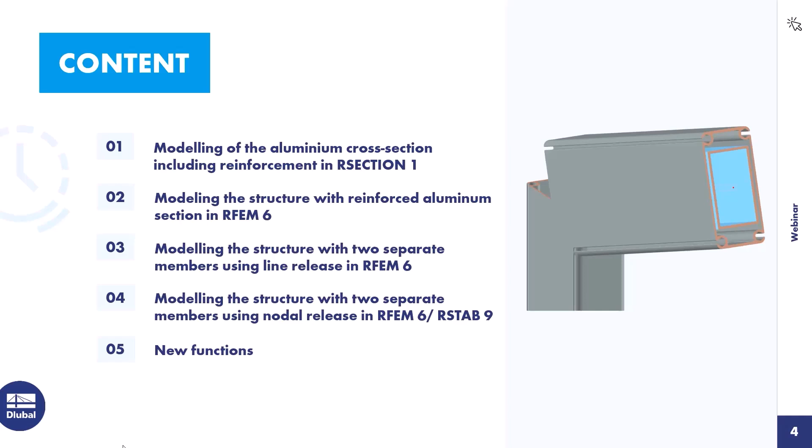This brings me to the first point, the modeling of the aluminum cross-section, including reinforcements in RSECTION. The cross-section geometry is available in DXF format so that I can use the import function. The creation of cross-sections based on DXF files was the subject of a previous RSECTION webinar. You can find this webinar on our website or on YouTube. There's also a knowledge base article on this topic on our website.

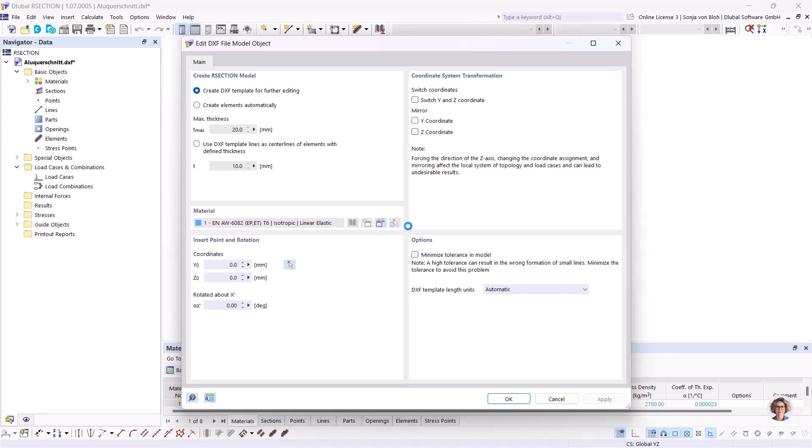I start the import process via File, Import, DXF. Then I choose the corresponding DXF file and click on Open. In the import dialog, I select the option Create DXF template for further editing. And then I click on OK. Now the lines of the DXF file will be created in RSECTION.

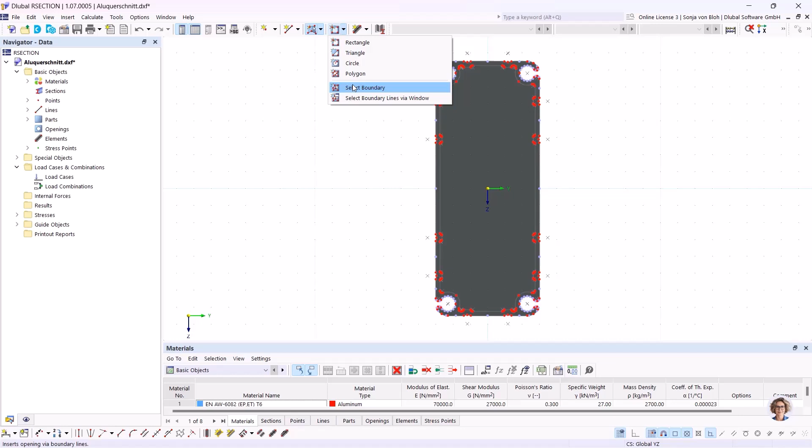I first create the part using the function select boundary. Here I have to define the material. I want to use this material that's already chosen here in this box. Then I click on OK and then I click on the corresponding line. The part is now created. Now I have to create the opening. For this, I also select the function that's available for openings, select boundary, and then I click on the corresponding line. I then deactivate the display of the parts and openings to get a better overview.

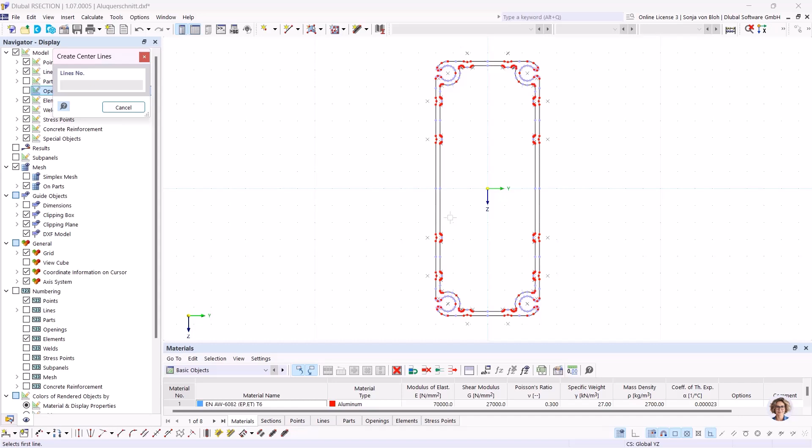I then create the elements necessary for the classification and calculation of the effective cross-section. To do this, I only model a quarter of the cross-section, and I then create the other parts by mirroring. To do this, I use the set centerlines function. I find this function here in this part. All I have to do is click on the two parallel lines. The center line is then generated automatically. First, I create the center lines for the flange, then for the arc, and then for the web.

The center lines then need to be extended. For this, I use the function extend graphically. Clicking on the left side of the line to be extended extends the line to the left, otherwise to the right, until it intersects with the next line. I will extend this line here to the left. And I also want to extend the center line of the web on both sides.

Since I only want to model a quarter of the cross-section, I trim the center lines accordingly. To do this, I use a function that I find here that's called To Location. This function makes it possible to extend or shorten a line to a specific location. I trim the center lines of the flange and the web to the center of the cross-section.

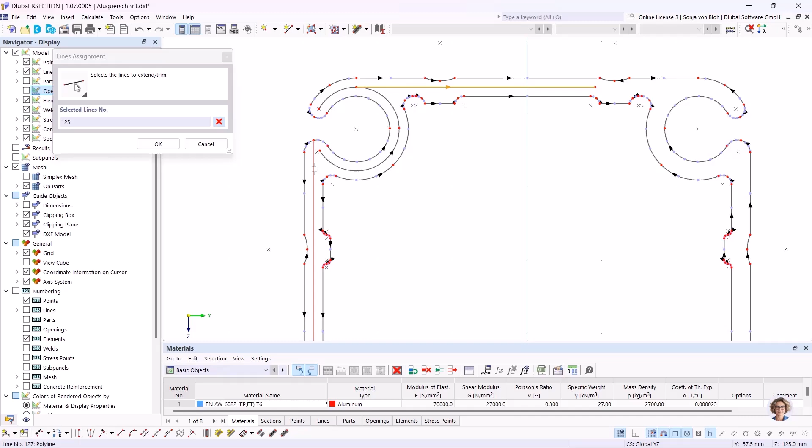To do this, I select these two lines, and then I click on OK. I then have to specify the side of the line to be modified. The direction of the lines is shown on the working area. I have to shorten the end of the line, so I choose this in this list box. Then I have to define the location in this part here. I choose the 0 point here, and then I click on OK.

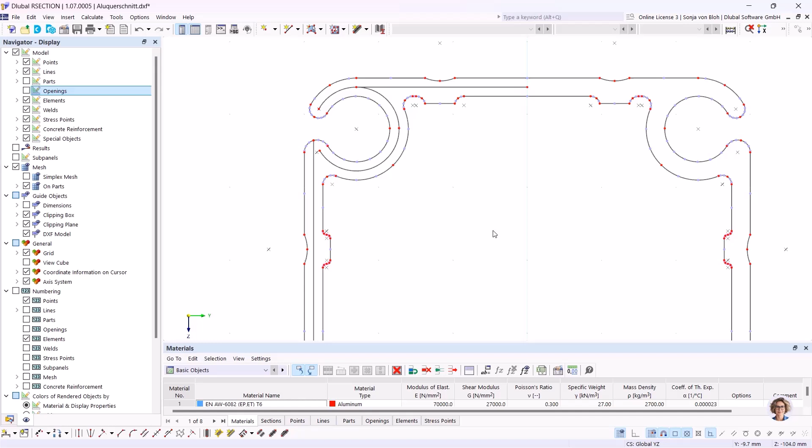Then the center line of the arc has to be connected to that of the web. And I make this connection with a straight line. For this, I create here a new line, and I connect it here. I don't need this line here, so I delete it.

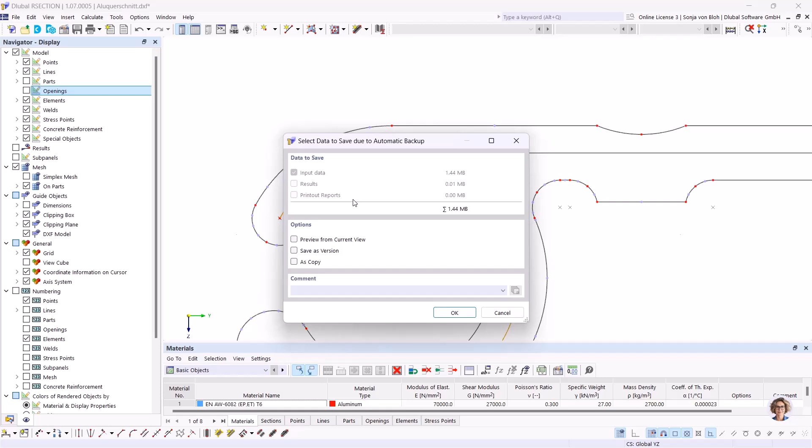Now, this line is not divided at this point, but it's necessary that it's divided because elements are only connected if they share the same node. For this reason, I divide this line in this location. To do this, I use the function connect lines and elements, and I draw a window about this part, and now the line is divided in this point.

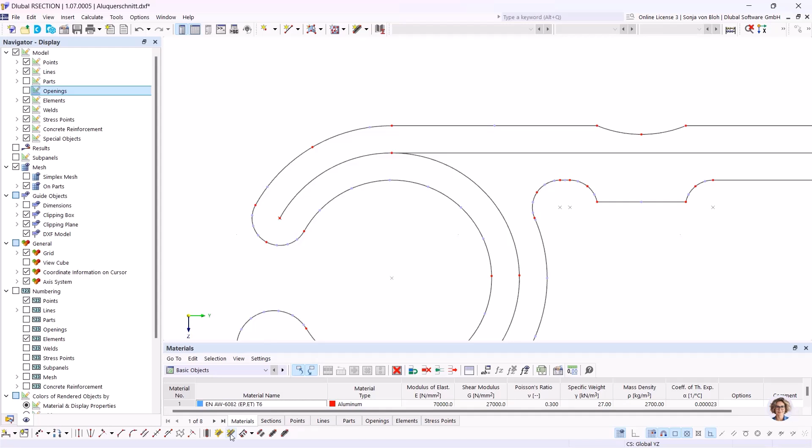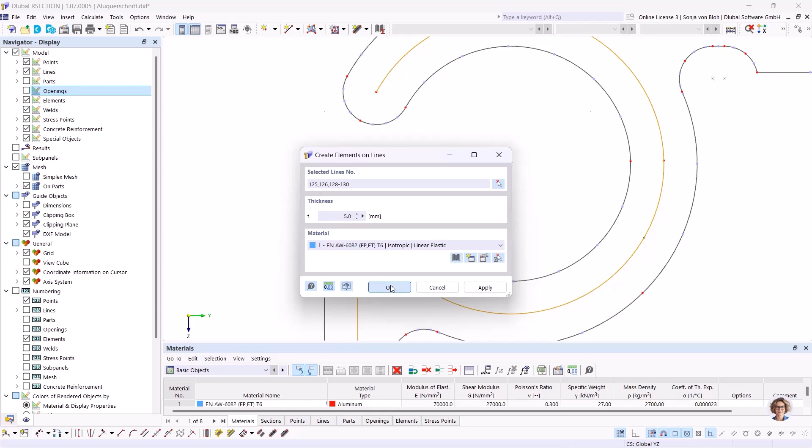I can now create the elements using the create elements on line function. I find this function here, create elements on line. All I have to do is to select the corresponding lines. I select all the center lines. I click on OK, and then I have to define the thickness of the elements, and here I define 5 millimeters. Now the elements are created.

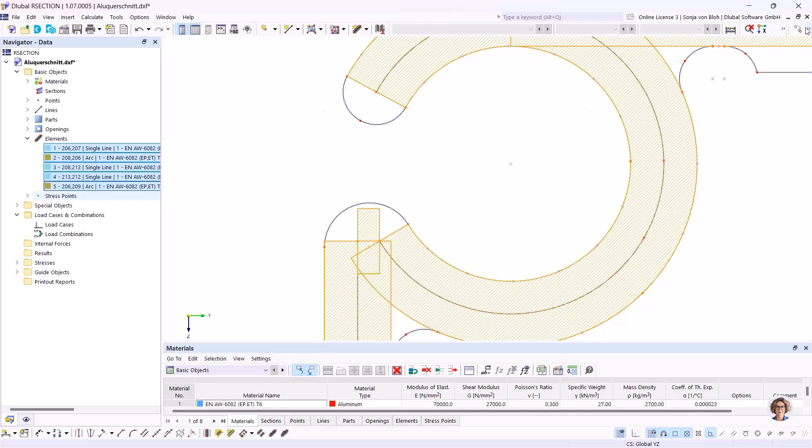I now select all elements here in Navigator Data, because I want to mirror them. For this, I choose here this function mirror. I want to create a copy, so I activate this option. Then I have to define the mirroring axis. It's the axis Z, and the point, it's the 0 point. And I click on OK.

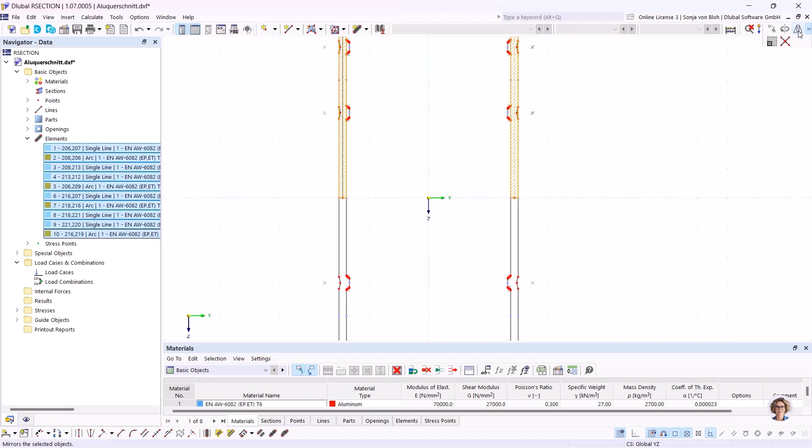Now the right part is created, and I need here the part on the bottom. So I select all of my elements and I open the dialog mirror copy again, and I change here the mirroring axis to axis Y. And then I click on OK.

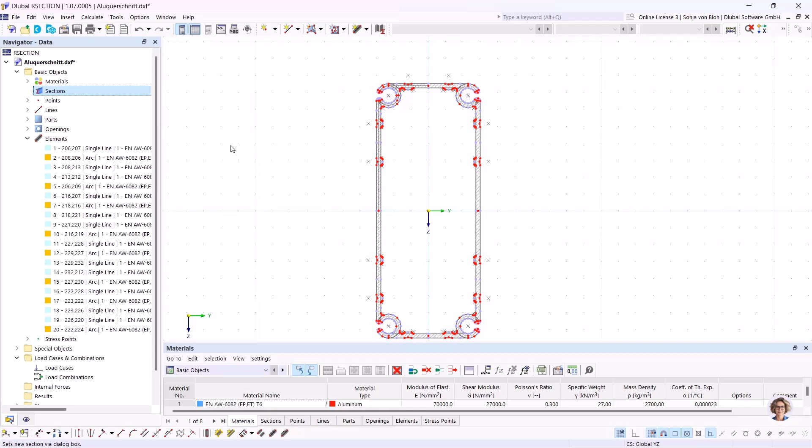I then create the reinforcement. This consists of a welded rectangular cross-section made of S235 steel. I import this cross-section from the RSECTION cross-section library. To do this, I go to Navigator Data and choose here New Section. Then I open the section library and choose the rectangular hollow section. This should be a welded rectangular hollow section, so I choose here the manufacturing type welded.

I also have to create a new material. I want to use steel S235 for this cross-section, so I create a new material, open the material library, and choose here S235 from this standard. Click on OK. OK, and then I have to define the geometry of this cross-section. Height is here 230 millimeters, the width is 100 millimeters, and the thickness is 5 millimeters.

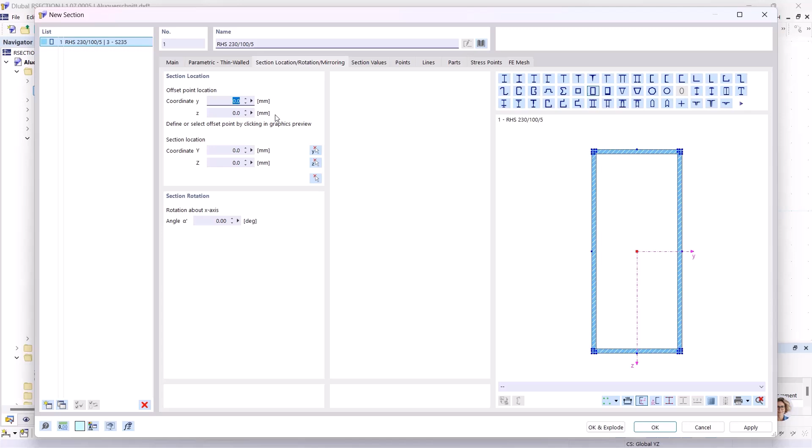In the tab section location rotation mirroring, I select here the 0 point as the insertion point, and I click on OK. Only cross-sections that are rigidly connected to each other can be imported into RFEM 6 or RSTAB 9. This connection is applied over the entire length of the member. If the cross-sections are not connected to each other, the modeling presented here is not suitable. Two members would then have to be created in RFEM or RSTAB. As I mentioned at the beginning, I will also show this today.

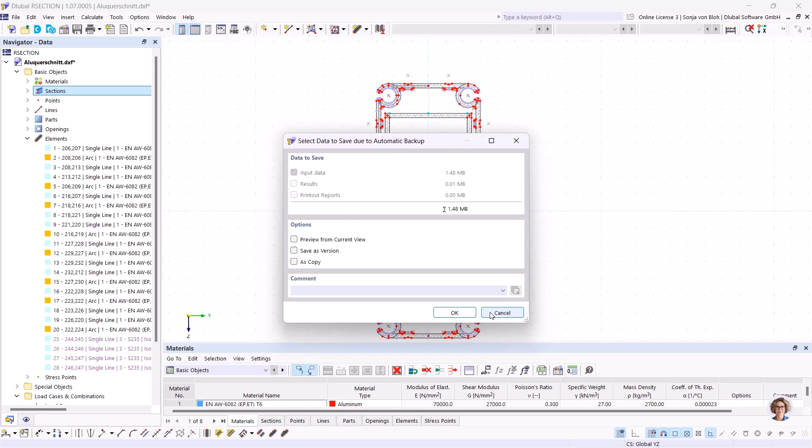In order to connect the two cross-sections, I have to explode the cross-section into its individual objects. To do this, I choose here this cross-section and choose here this function explode. I create the connection between the two cross-sections using an element with a 0 thickness. To do this, I open here this function new element, define a thickness of 0 millimeters, and I also have to define an effective thickness for shear transfer, and this will be 5 millimeters. Then I create the two elements.

In the base data, I open it here, I set the thin-walled analysis method. This is necessary because the connection of the two cross-sections was made using elements with zero thickness. These cannot be taken into account with a finite element analysis. The connection of the two cross-sections would have had to be made using parts.

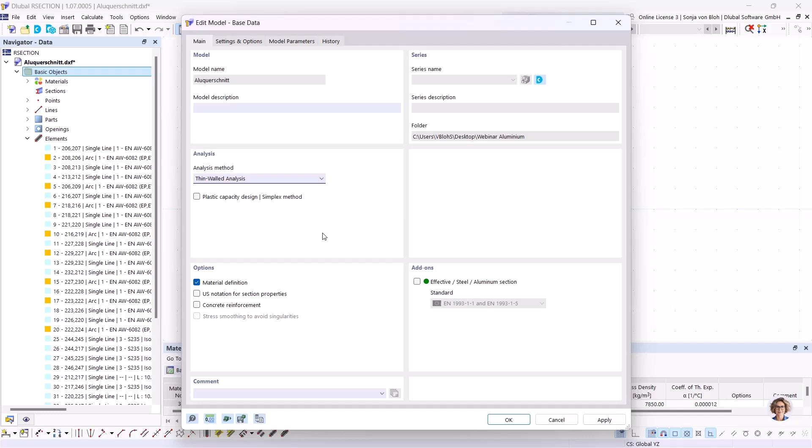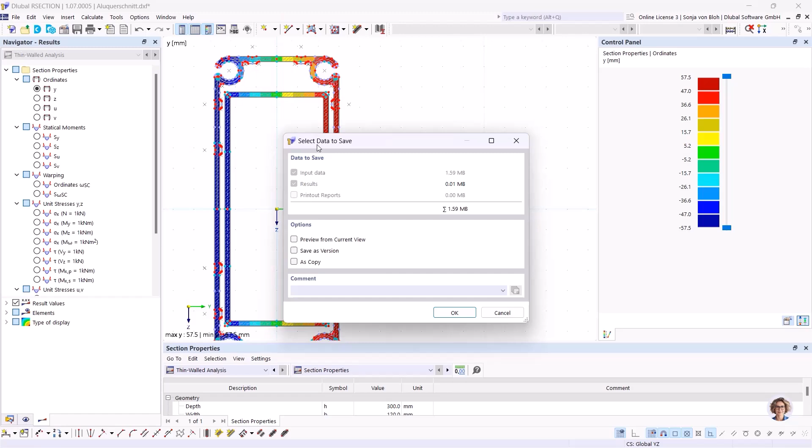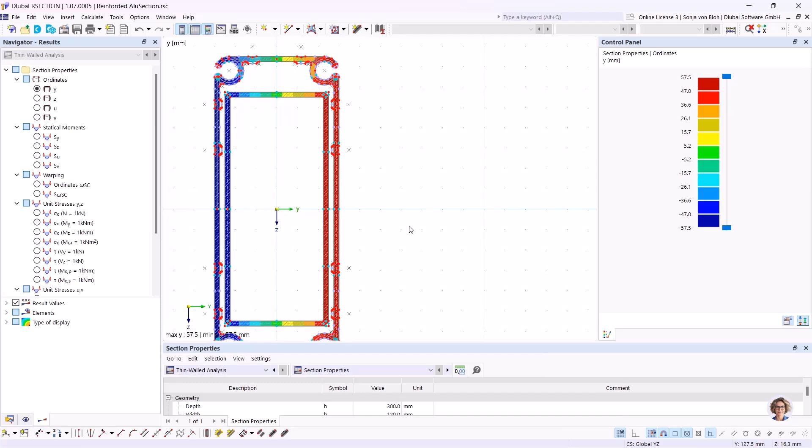It's advisable to start the calculation once in order to find possible modeling errors. Here, no errors will be found, so I now save this cross-section. I name it here reinforced alu section. Then I can close this cross-section.

I now can model the structure in RFEM. So I open RFEM. Here I have already created a new file, and I have to import first the aluminum cross-section with the reinforcement that I've just created.

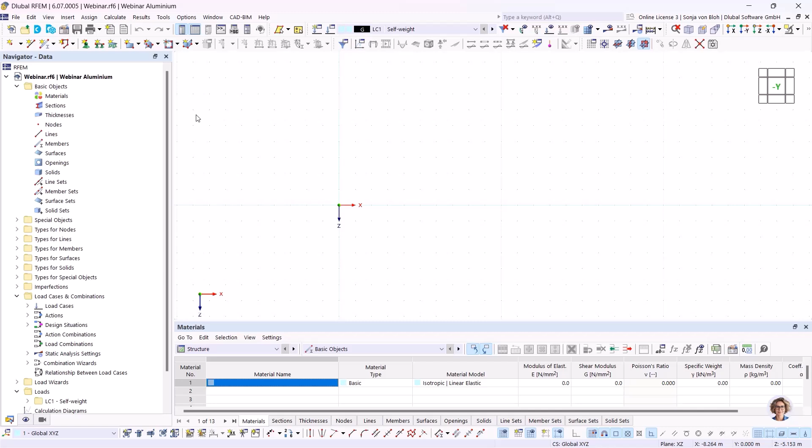To do this, I go to Navigator Data, choose here New Section, open the section library from RSECTION, and I choose here the reinforced aluminum section.

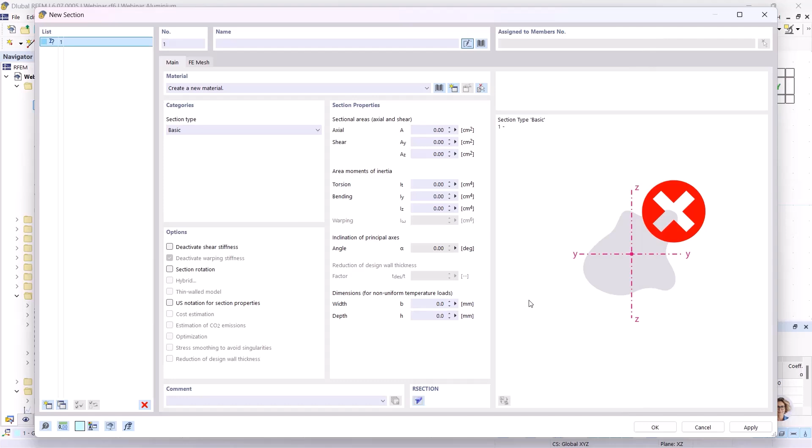I still need this cross-section without reinforcements, and for this I want to show you a new function in RFEM or RSTAB. In RFEM or RSTAB, it's now possible to open this cross-section in RSECTION, to modify this cross-section in RSECTION and to import it again in RFEM or in RSTAB. To do this, I copy this cross-section and then I open this cross-section in RSECTION.

In RSECTION, I then delete the steel cross-section and the connection between the steel cross-section and the aluminum cross-section. Then I start the calculation again to see if there are any errors. There are no errors, so I can save this cross-section.

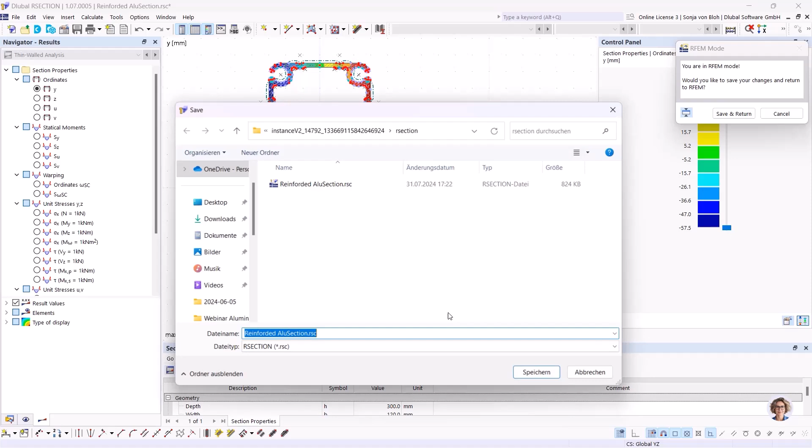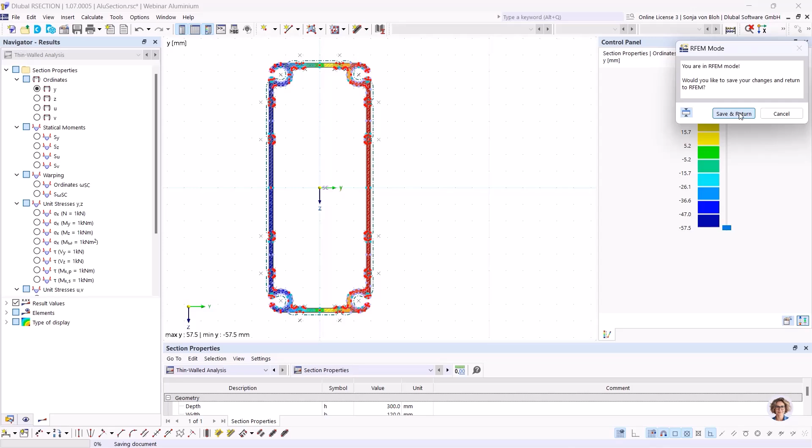I want to save this cross-section also on my disk, so I choose here File, Save As, and I change the name to Alu section, and then I save this section on my disk. Then I save this section. I go to Save and Return to RFEM, and by clicking Save and Return, I also apply this change in RFEM.

You can see now this cross-section is without this reinforcement, and this cross-section includes this reinforcement. If I had just clicked Save and Return, only the cross-section would have been changed in RFEM, but the original status of the cross-section would have been left on the hard drive. Then I click here on OK.

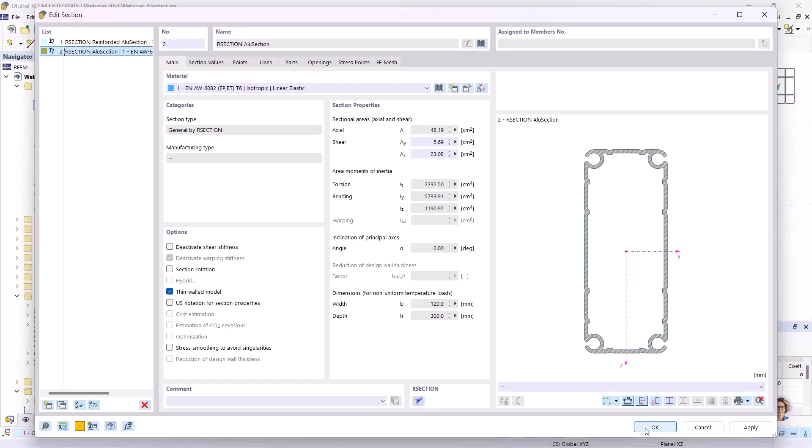I then model the column with the unreinforced aluminum cross-section. I choose here New Member, choose the aluminum cross-section, and then I define the column with the height of 6 meters, and I model the beam with a length of 8 meters.

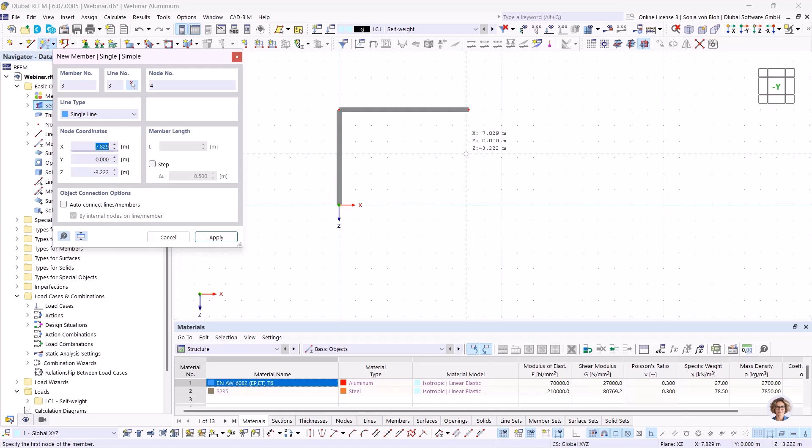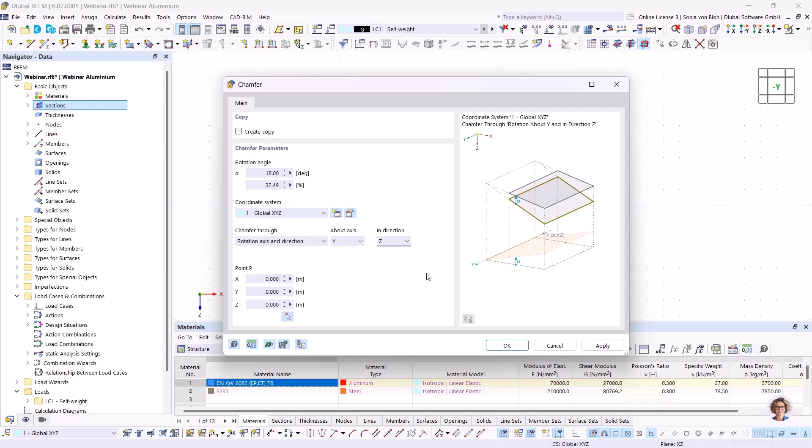The roof pitch is 18 degrees, so I use the function chamfer. I find this function in menu Edit, Manipulation, Chamfer. Here I have to define the rotation angle of 18 degrees, and I have to define the rotation axis. This is the axis Y, and the rotation direction, and this is the direction Z. Then I choose the frame corner as the rotation point. Now this beam is rotated by 18 degrees.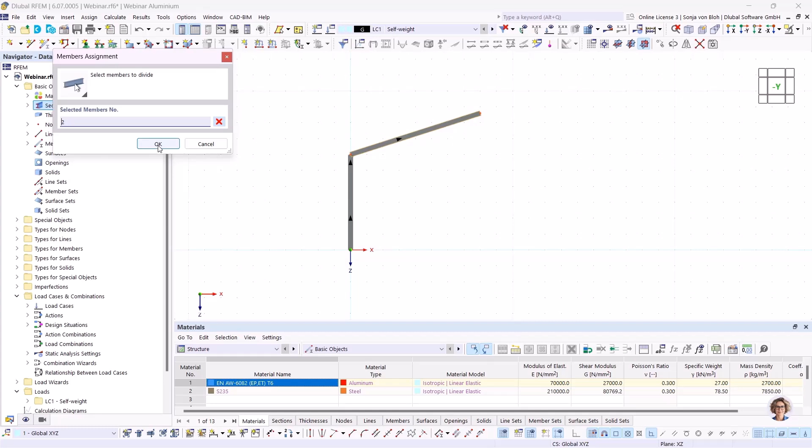The frame corner is reinforced with steel over a length of 0.5 meters. I therefore divide the column with this function, by distance, and here I define a length of 0.5 meters. Apply this, and I have to do this also for the beam, but here on member start. Now the column and the beam are divided into 2 parts.

I then define hinged supports at the beginning of the column and the ridge. To do this, I assign a nodal support here, on the column and on the ridge.

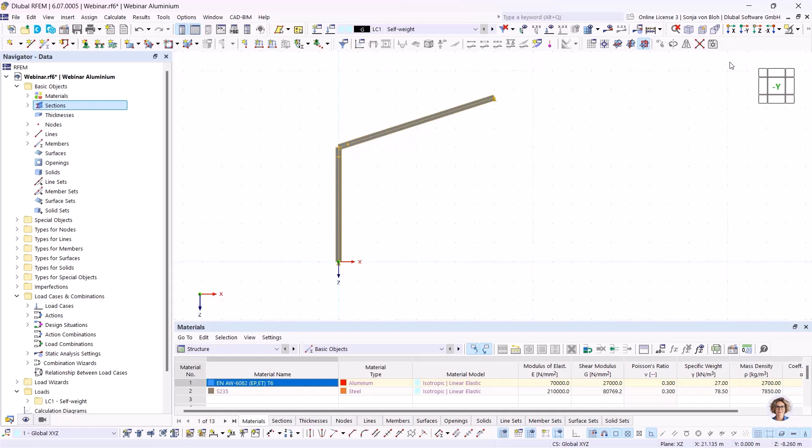Since I want to show different modeling options today, I copy the frame twice. I use here the Move/Copy function and activate Create Copy. Number of copies is 2, and the displacement vector is 10 meters.

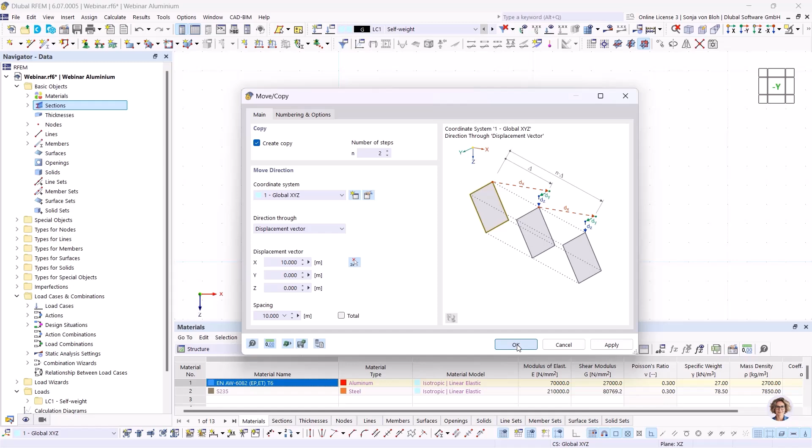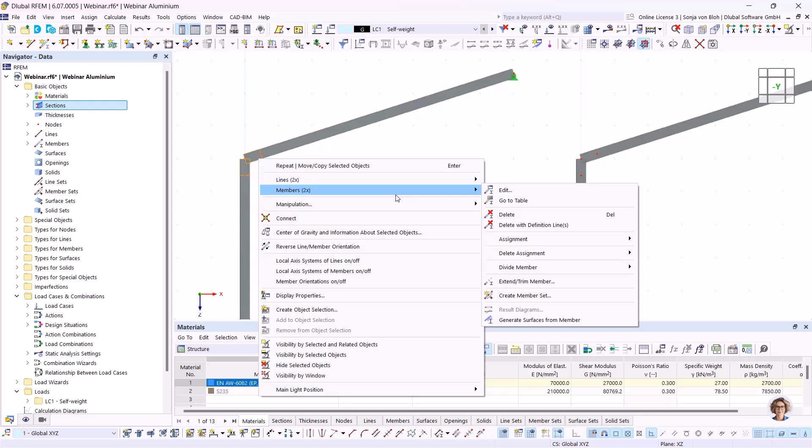First, I will show the modeling of the reinforced frame corner with the aluminum cross-section and reinforcement that I just created in RSECTION. To do this, I only have to change the cross-section in the frame corner. I choose here the 2 members, choose Edit, and then I choose here the reinforced aluminum section.

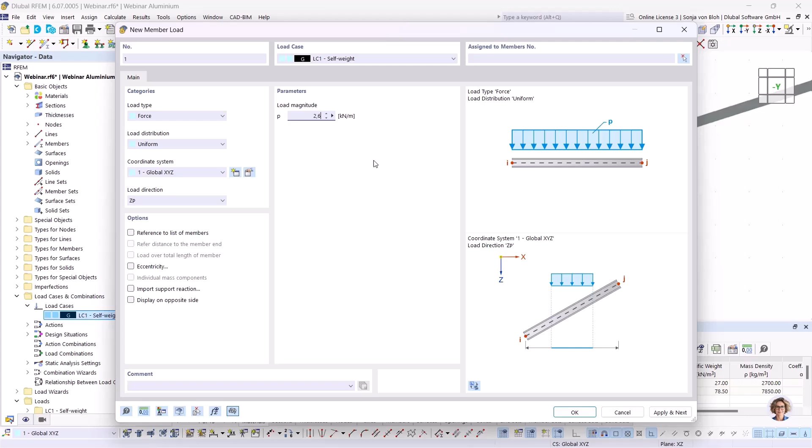Then I have to define the load. I do not want to consider the self-weight, so I deactivate the self-weight in this load case. And then I create the member load, here in load direction global Z on projected length, with a load magnitude of 2.6 kN/m. And I define it on these two members.

The disadvantage of this modeling is that it's not possible to design cross-sections with different materials in the add-on Aluminum Design or Steel Design. However, the stresses can be determined in the add-on Stress-Strain Analysis. In addition, I cannot define the coupling conditions between the aluminum and steel cross-sections.

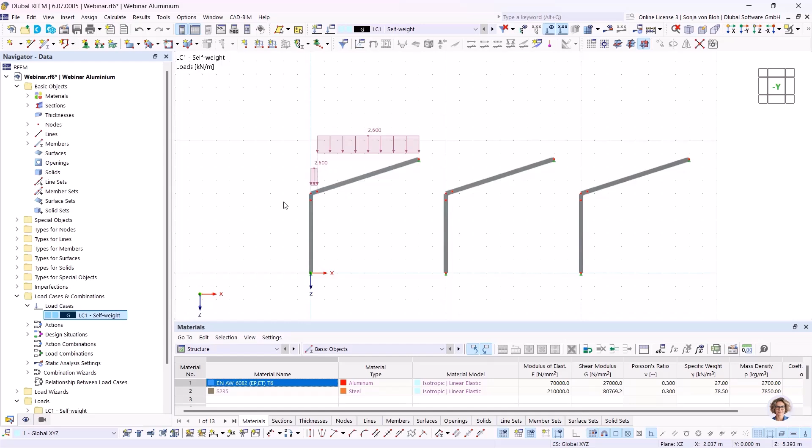So with this type of modeling, I cannot define that the aluminum cross-section is only slid over the steel reinforcement, and thus the steel cross-section only supports bending. The axial force here acts on the entire cross-section. If I start the calculation here, I will see this in the internal forces.

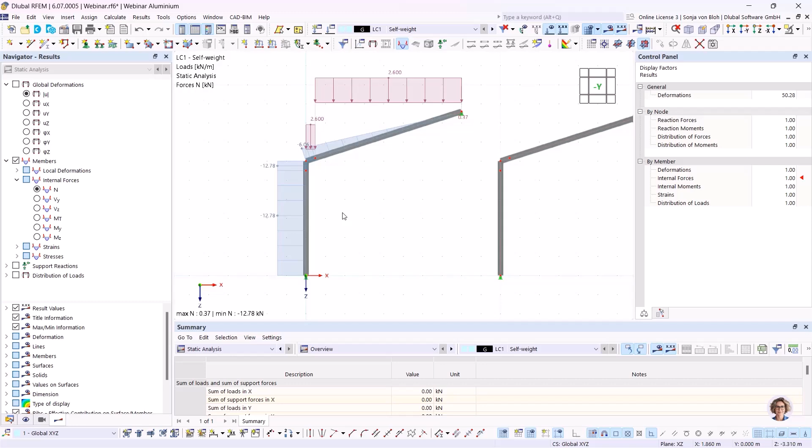However, both mentioned disadvantages can be avoided by modeling two members. First, I would like to show you an option that is only available in RFEM. This is the modeling using line releases. A line release allows the model to be decoupled along a line. I would like to show you the principle in my presentation. For this, I go to my presentation.

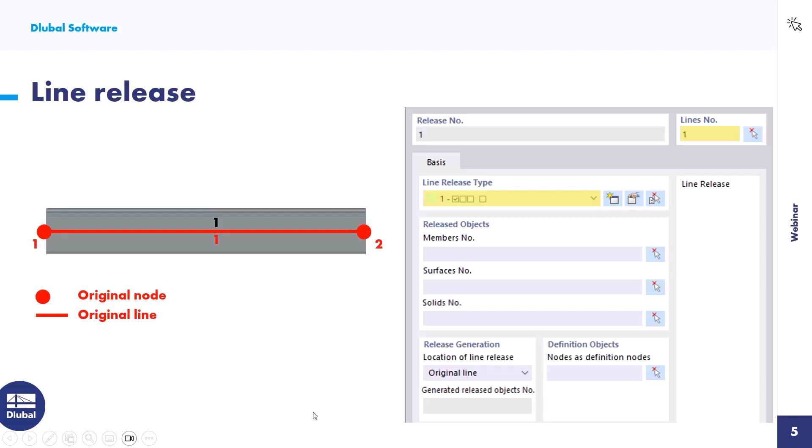The line releases create nodes 3 and 4 as well as line 2, which is defined via these nodes. The generated released objects are output in the release generation part here. The lines are coupled along their length using the hinge condition defined in the line release type. This is indicated by the coupling bars shown on the graphic.

The position of the line hinge can be defined in the section release generation too. It can be defined on the original line or on the released line. This is defined here on the original line. In this example, this is line 1. The released line is automatically created with the corresponding nodes as a copy.

However, if you want to use one or more existing nodes for the generated line, you can specify the corresponding node numbers in the section definition objects. This affects the results because the displacements at these nodes are not released. So for example, if you define nodes 1 and 2, as in this example, as definition nodes, the released line is defined using the original nodes 1 and 2.

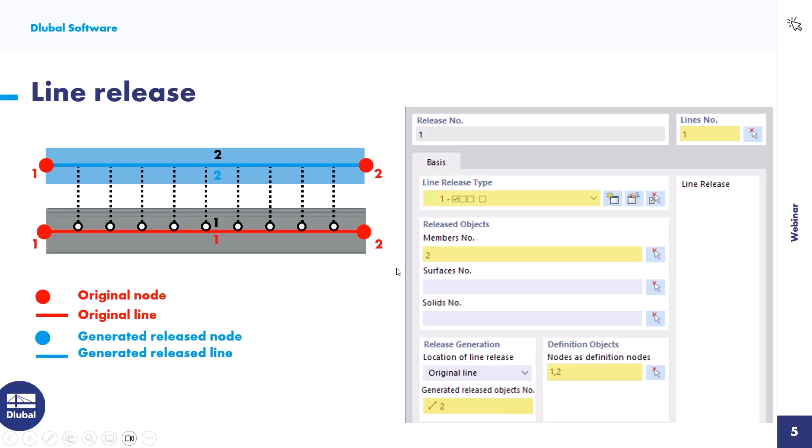I can now define the member on line 2 and then specify it as a released object. This is member number 2. I would now like to show you the modeling in RFEM. For this, I go back to RFEM.

First, I create a new line release. I go to Navigator Data and I find the line releases under Special Objects, Line Releases. Here I create a new line release. I then select the corresponding lines. These are lines 7 and 6. After that, I create a new line release type. The displacement in the X direction should be released here.

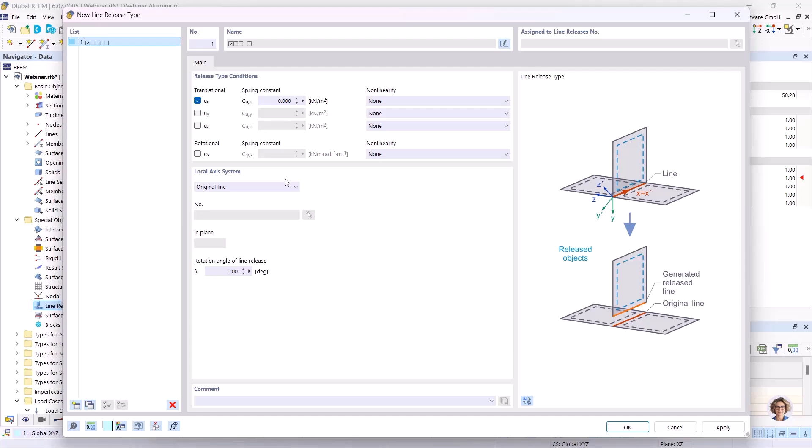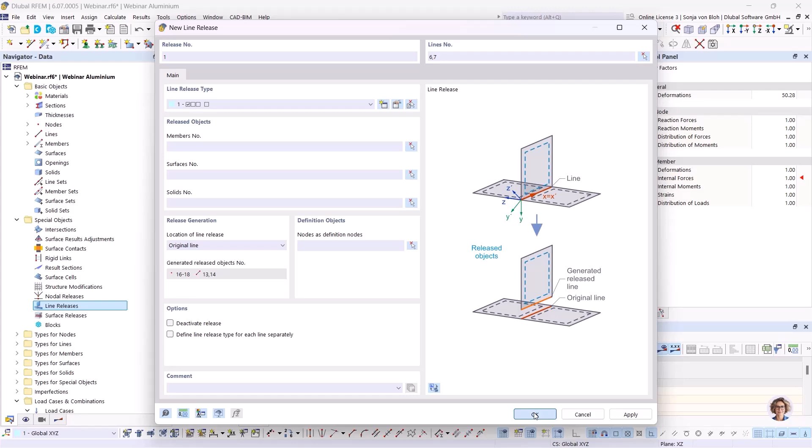Click here on OK. And this line release creates lines 13 and 14 on the release nodes 16 till 18. Lines 13 and 14, I open here in the Navigator Data. I now define the reinforcement cross sections. To do this, I choose the two lines, click on Edit, and I apply a member on these lines.

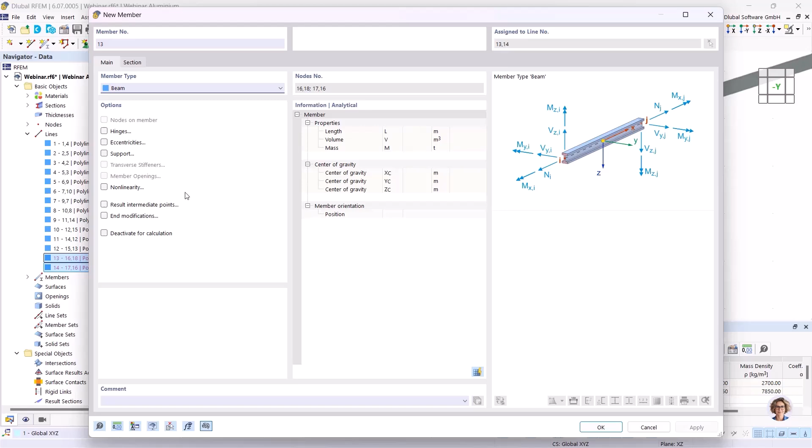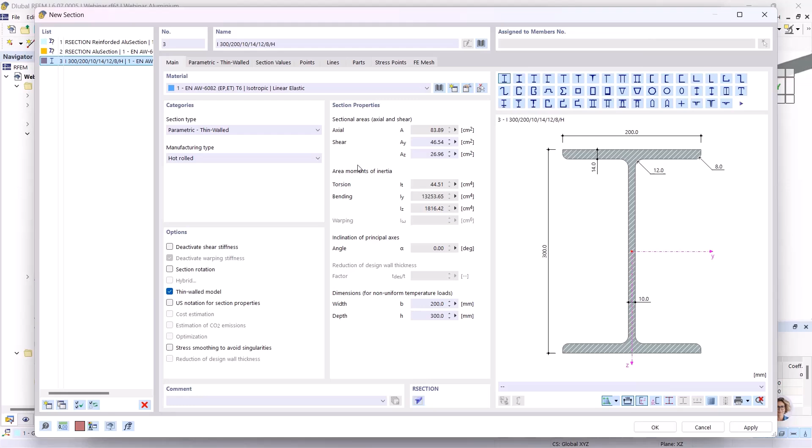And I have to create here a new cross section, and this should be the welded rectangular hollow section. To do this, I open the section library, choose here rectangular hollow section. This section should be welded, so I choose the manufacturing type welded and the material S235. Now I have to define the geometry.

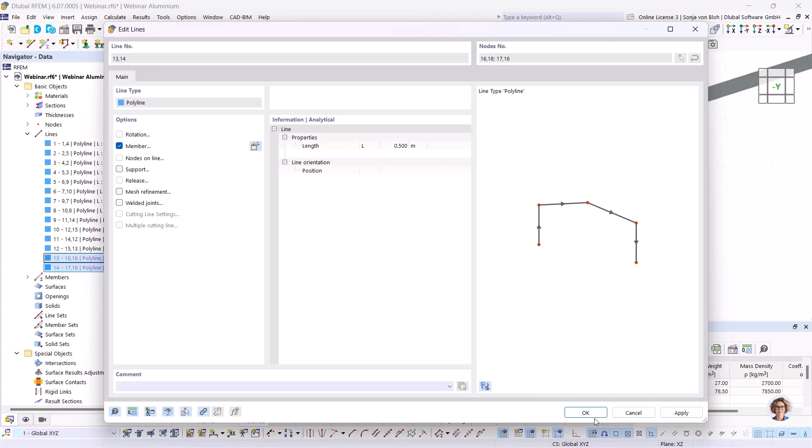The height is 230 millimeters and the width is 100 millimeters and the thickness is 5 millimeters. Then I click here on OK. And now the member is applied on this line.

To ensure that the aluminum cross sections are all connected to one another, they must be defined using the original nodes. The steel cross sections must be defined using the released nodes. I control this using visibilities. For this, I go to the Navigator Views and first I will show here the steel cross sections.

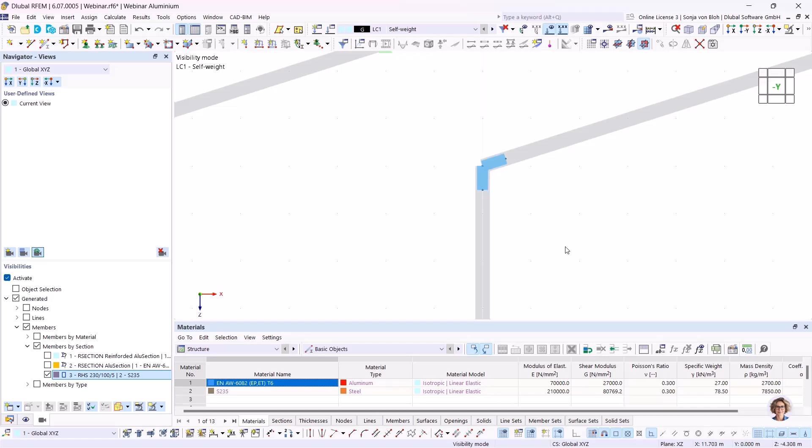These are defined using the release nodes, and the release nodes have a blue color here. If I move the mouse over the node, a reference to the associated line release is also displayed. You can see it here. Then I only show the aluminum sections, and the aluminum sections are only defined using the original nodes, and the original nodes have a red color.

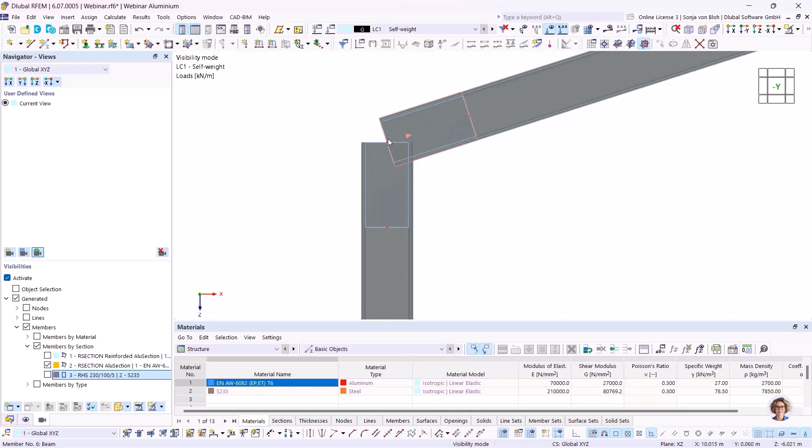Since the aluminum cross-sections only slide over the steel reinforcements, I still have to define member hinges on the aluminum cross-sections in the frame corner here. For comparison purposes with the other structure, I will not show this today. I then define the member load of 2.6 kilonewtons per meter on the aluminum beams. To do this, I choose here the new member load and define it on these beams. Then I start the calculation.

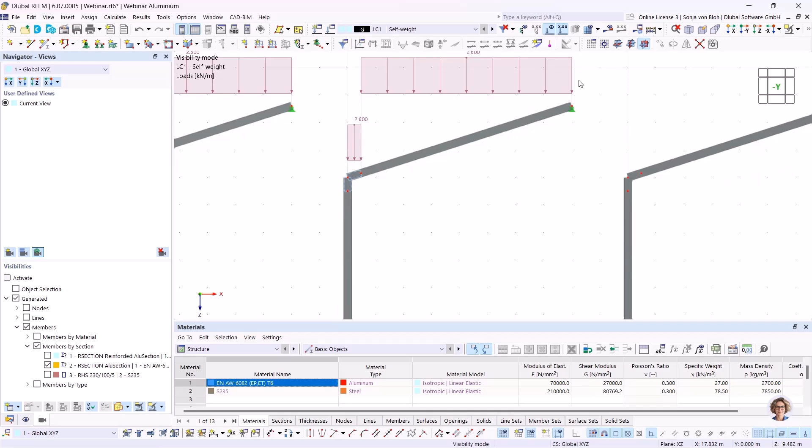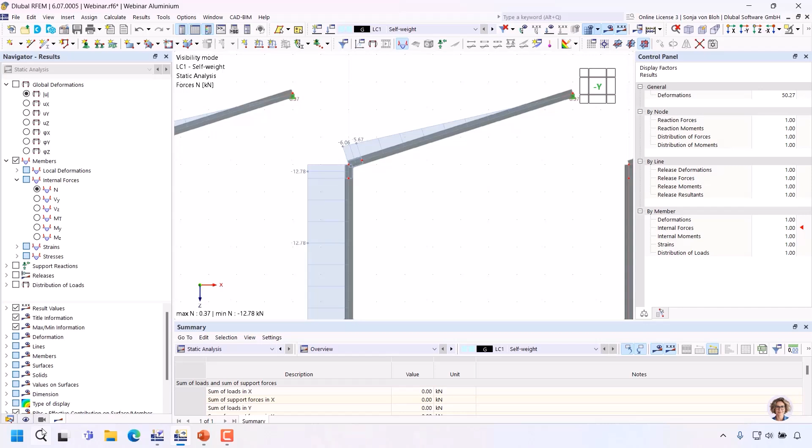I first look at the axial forces, and the axial force is applied only on the aluminum cross-section. If I show here the steel cross-section, I see that no axial force is applied here. This is because we have defined the line release with the release in X direction.

Then I show the bending moments here on all cross-sections, and then I see here the bending moments are applied to both members via its stiffnesses. The bending moments are applied on the steel cross-section and on the aluminum cross-section.

As already mentioned, line releases are only available in RFEM. However, modeling with two separate members is also possible in RSTAB. Nodal releases are available for this in RSTAB. You can also use nodal releases in RFEM. I would like to show you the principle in my presentation.

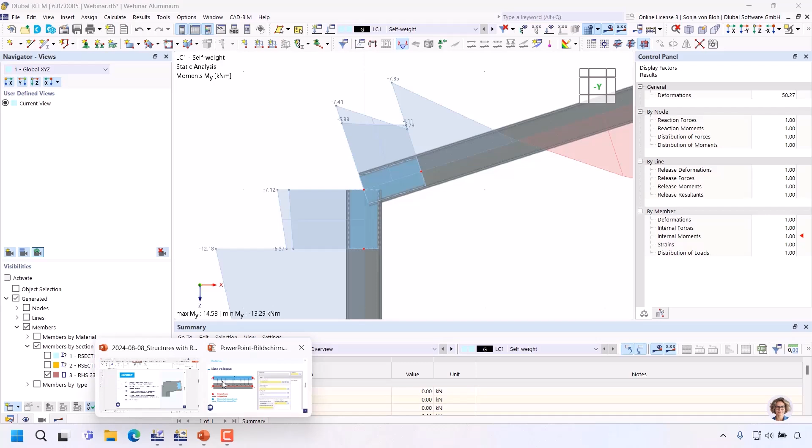Shown is member 1, which is defined via nodes 1 and 2. First, I have to select the nodes at which the release is to be defined. Furthermore, the properties of the nodal release must be defined. This definition is made in the nodal release type. The properties of the releases are described by a hinge.

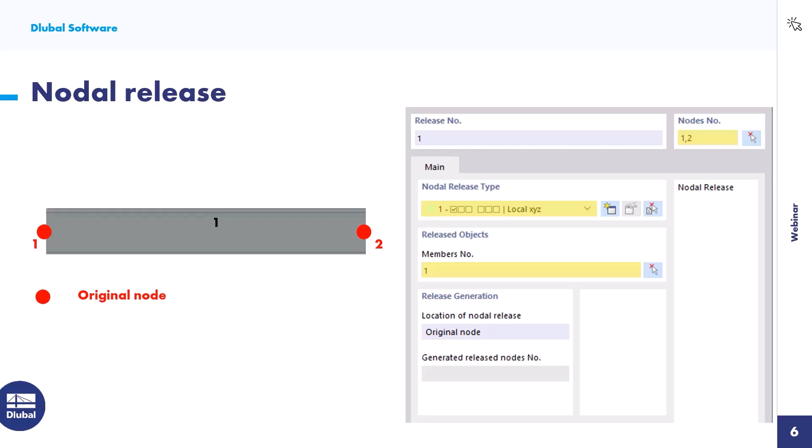The position of the hinge can be defined in the section release generation on the original node or on the released node. I also have to specify the released objects. This is the member number 1 in this case. The nodal release creates the release nodes 3 and 4. The generated released objects are output in the section release generated here.

The nodes are coupled via the hinge conditions defined in the nodal release types. You can see it here. Member 1 is now defined between the released nodes 3 and 4. Member 2 can now be defined between nodes 1 and 2. It should be noted that in contrast to line releases, the two members are only connected to each other at nodes 1 and 3, here at this part, and at nodes 2 and 4, but not over the length of the member.

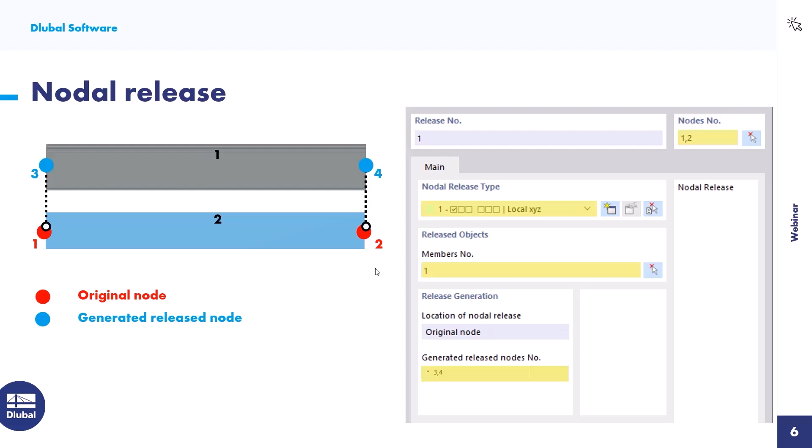If the coupling conditions are to be applied along the length of the member, in the solution with nodal releases, the two members would have to be divided at small intervals and nodal releases defined at the intermediate nodes. I would now like to show you the modeling in RFEM. For this, I open RFEM again.

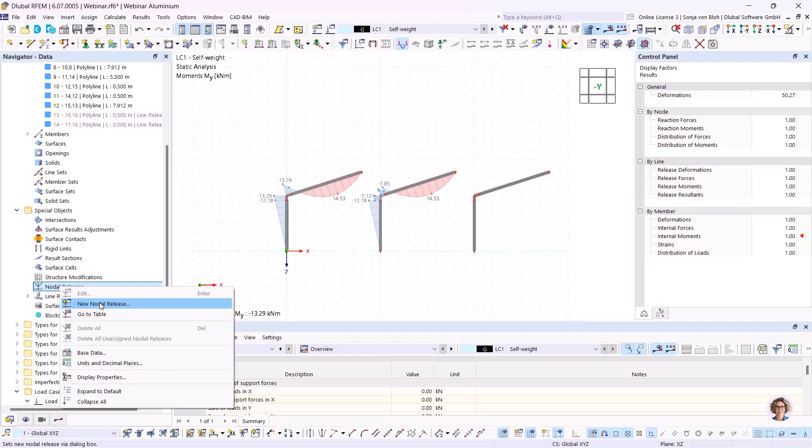First, I have to create the new nodal release. I go here to the navigator data and I find the nodal releases here under special objects, and I create here a new nodal release. Then I select the corresponding nodes. These are the nodes 14, 12, and 15.

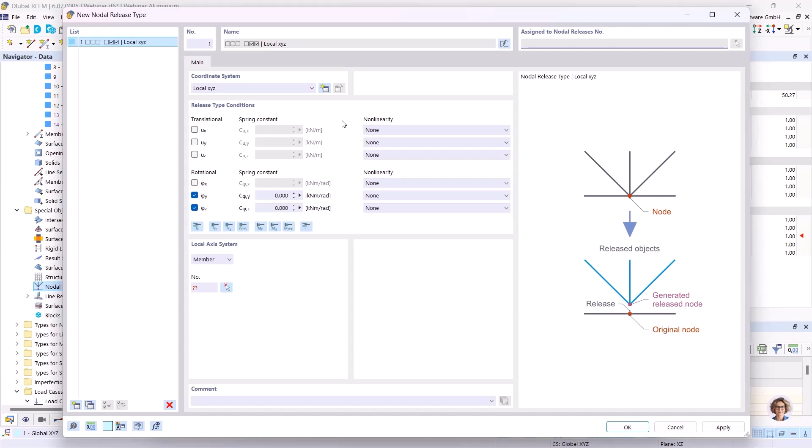The nodal release type should be defined separately for each node because the reference axes are different. So I activate here this checkbox, define nodal release type for each node separately. Then I go to the tab nodal release type, and here I have to create a new nodal release type for this node 12. And here, once again, the displacement in X direction should be released. Then I have to define the local axis system, and I choose here the local axis system from this member.

This release should be also used for node number 15. And for node number 14, I have to create a new nodal release type. Release is also in X direction, but the member is here member number 9. Then I have to define the released objects, and these are the objects 11 and 10. The generated release nodes are 19 till 21. Then I click on OK.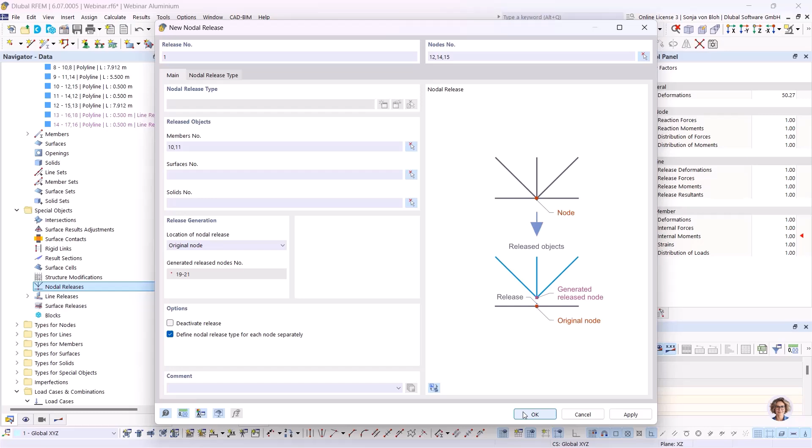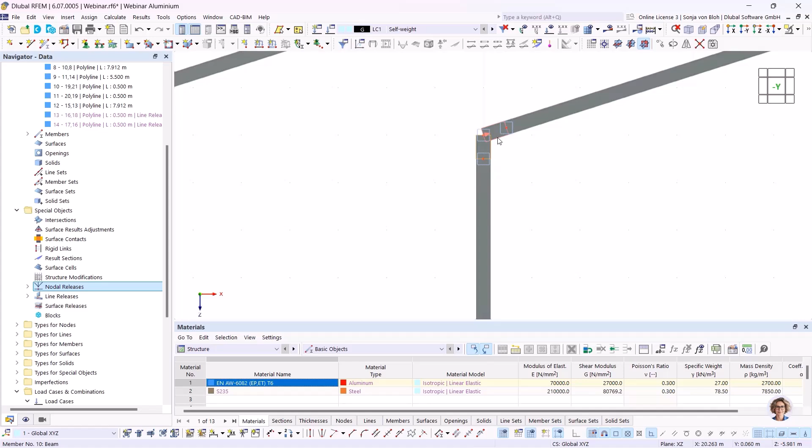The released aluminum members are now defined via the released nodes and no longer via the original nodes. In order for the aluminum cross-sections to be connected to one another, they must all be defined via the original nodes. Therefore, I now change the cross-section of the released members. I choose here Edit to the steel cross-section.

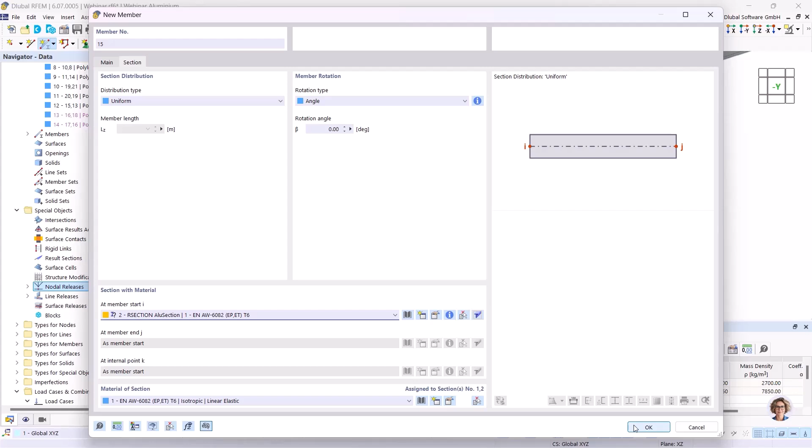I then define the aluminum cross-sections between the original nodes. To do this, I open here the new member, choose here the aluminum cross-section, and then I choose here the original nodes for the definition.

I check this again using the visibility. For this, I open the navigator views and activate the visibility for the steel cross-sections.

The steel cross-sections are defined via the release nodes. Release nodes are colored in blue. I can see it here, and if I move with the mouse over the node, I see this is a node created via a nodal release.

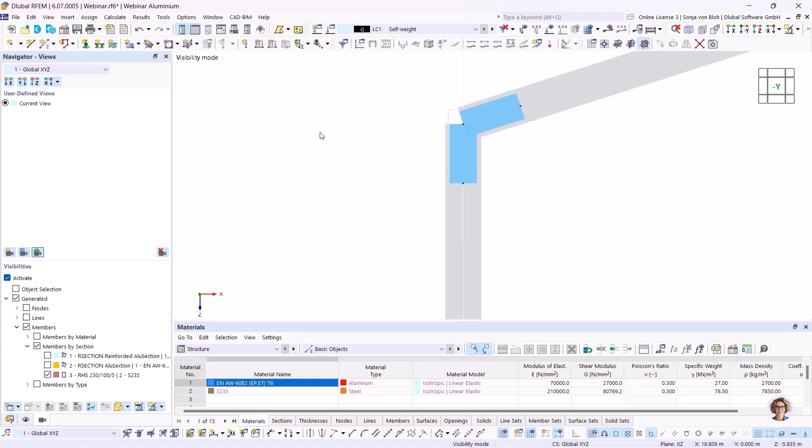Then I show the aluminum cross-sections only, and the aluminum cross-sections are defined via the original nodes. The original nodes have a red color. I can see it here if I move the mouse over the node.

Since the aluminum cross-sections are only slid over the steel reinforcement, I still have to define moment hinges on the aluminum cross-sections in the frame corner. As I mentioned before, for comparison purposes with the other structure, I will not show this today.

I then define the member load on the beam, on the aluminum beam, with the same load magnitude. And then I start the calculation.

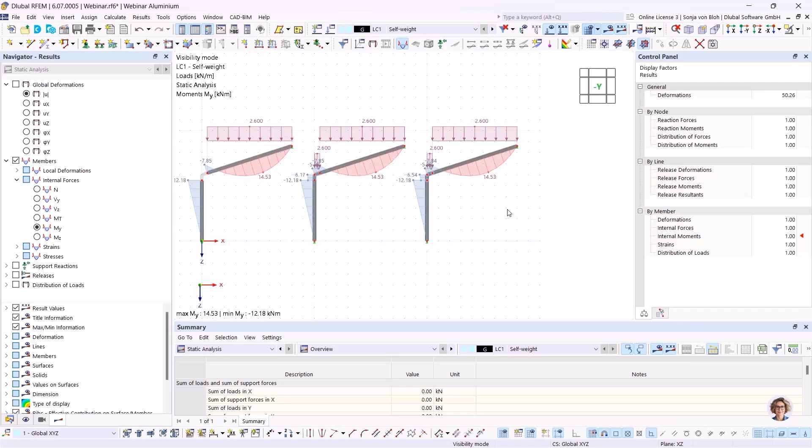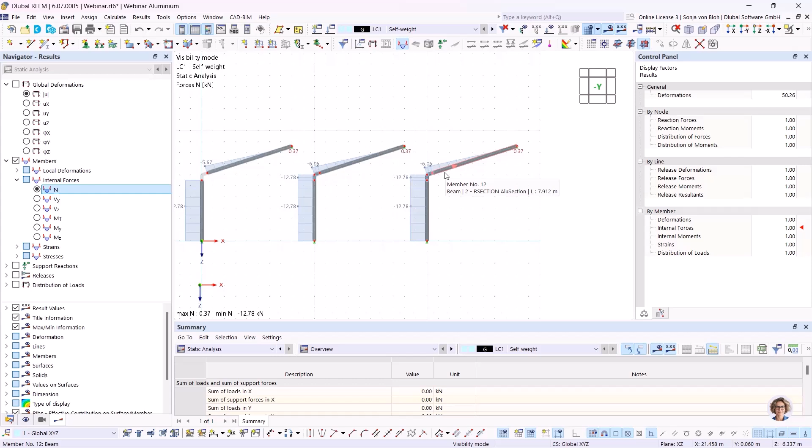I first look at the axial force. Due to the hinge defined in the line release in X direction, the axial force is only transferred via the aluminum cross-section. You can see it here. If I show the steel cross-section, no axial force is applied here.

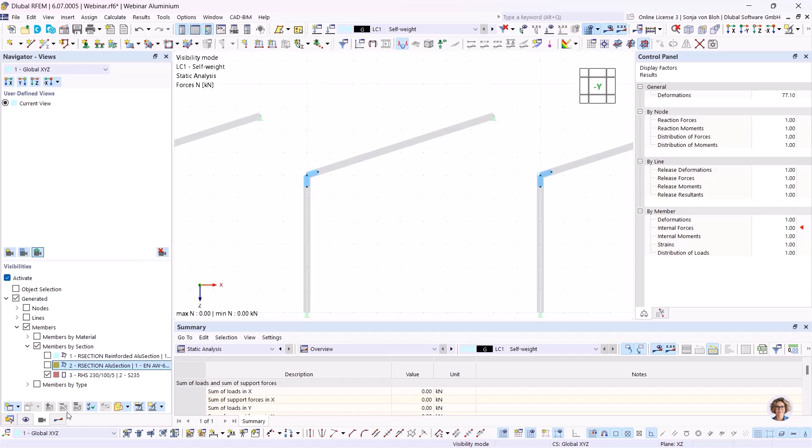The steel cross-section also contributes to bending. I will show you this also. If I show here the bending moments My, I show it on the whole cross-section, and you see that both members have a bending moment.

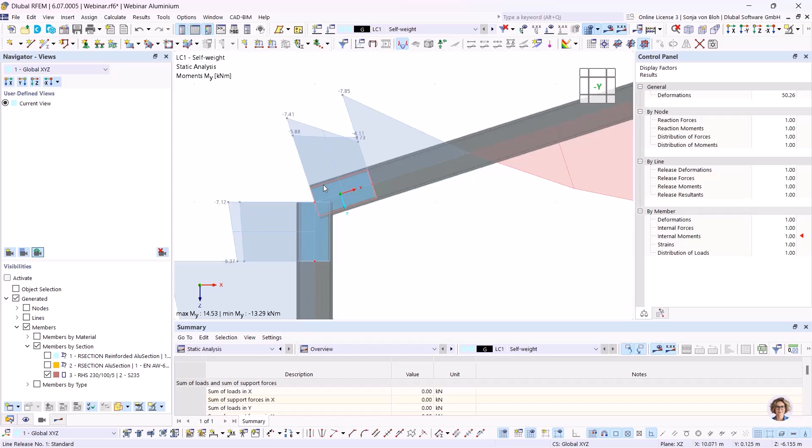This brings me to the last point of today's webinar, the new features. You can now also read results such as the member sag from the dimension. To do this, a linear dimension must be defined on the member. I now define a linear dimension on the beam.

And to see here also the results, I have to go to the navigator results, and I have to activate under dimension the results on member. If I want to see the deformation, I activate here the global deformation, and I see now the result here on the dimension related to the deformed system.

A member sag corresponds to the largest dimension of an imaginary line between the deflected beginning and end of the member section. The supports are very stiff, so the member sag differs only slightly. Here the member sag is 24.1 millimeter in comparison to the global deformation of 24.2 millimeter.

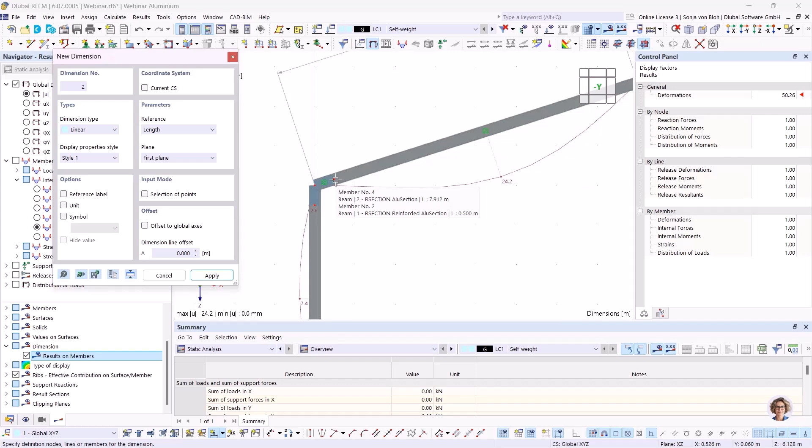If I define a dimension between the end of the reinforcement and the end of the beam, the difference will be clearly visible. I do it here. I choose here the two nodes. And you can see here the sag deformation is now 22.5 millimeter in comparison to 24.2 millimeter for this section here.

Another new function allows you to examine the stresses within members using clipping planes. Clipping planes are cutting planes that you can freely place through the model. The area in front or behind this plane is shown transparently in the view.

The predefined clipping planes can be used for this, and you find these predefined clipping planes in the navigator data, here under guide objects, clipping planes, and we have here three predefined clipping planes. However, it's also possible to define user-defined clipping planes.

I want to activate the clipping plane, so I choose here clipping plane on. And I want to examine the normal stresses here in the member. Therefore, I choose here the display of the stresses.

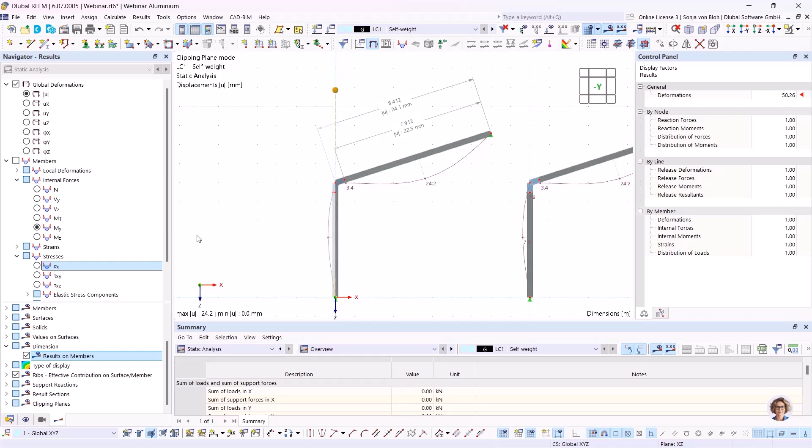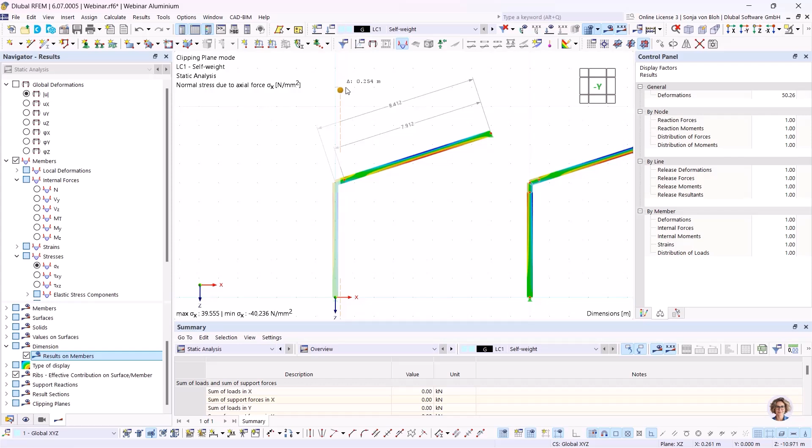I can then move the clipping plane to the desired location with the mouse via these controls. I can see now the stresses here in the cross section, and here in the cross section of the unreinforced part.

This brings me to the end of the webinar. I will now hand the floor back to Andreas.